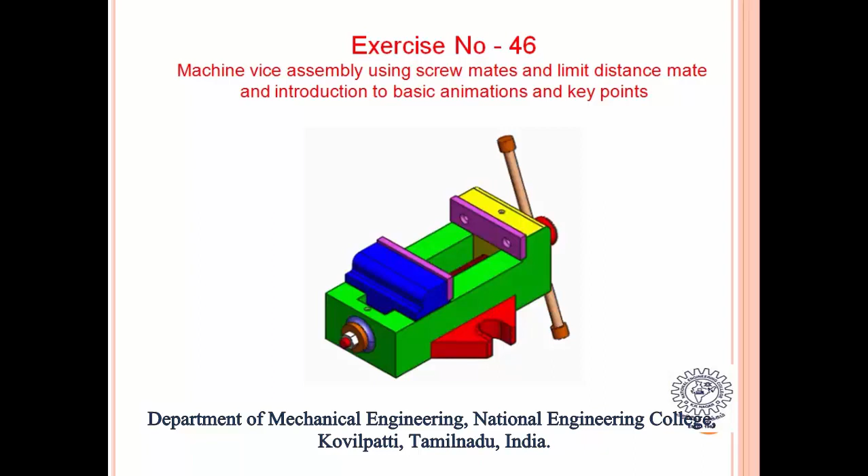Exercise number 46. Assembly of machine vise. First, select new assembly and click insert components and browse for the vise. Select the vise and give open. Make it as a fixed part.

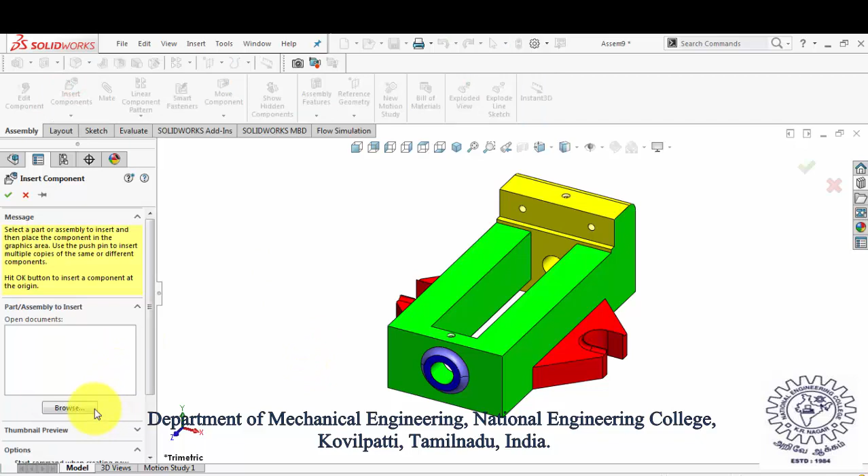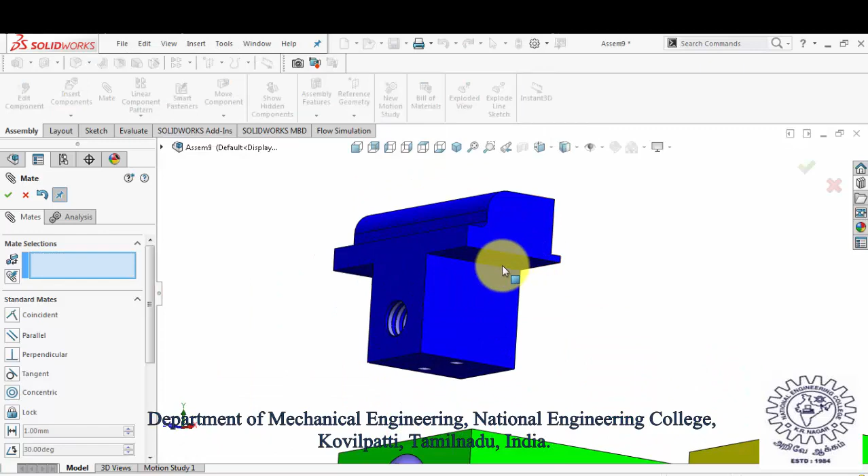Now select insert components and browse for moving jaw. Now open this component and select the side surface of the moving jaw on the surface of the vise and give coincident mate. Now select the bottom surface of the moving jaw on the top face of the vise and give coincident mate.

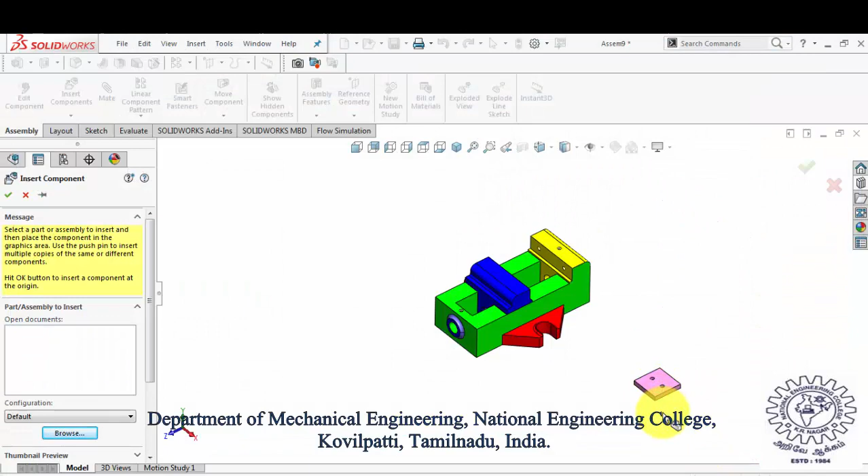Now select insert components and browse for clamping plate. Now select the face of the clamping plate on the bottom surface of the moving jaw and give coincident mate. Select the hole in the clamping plate on the inner projections of the moving jaw and give concentric mate.

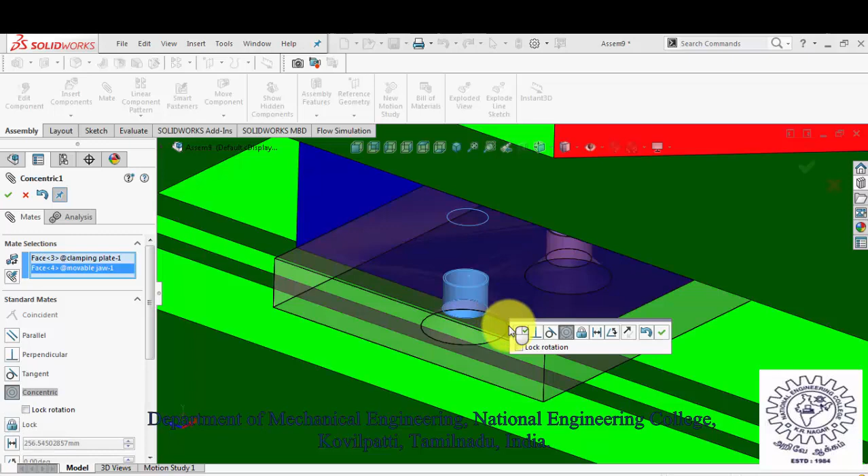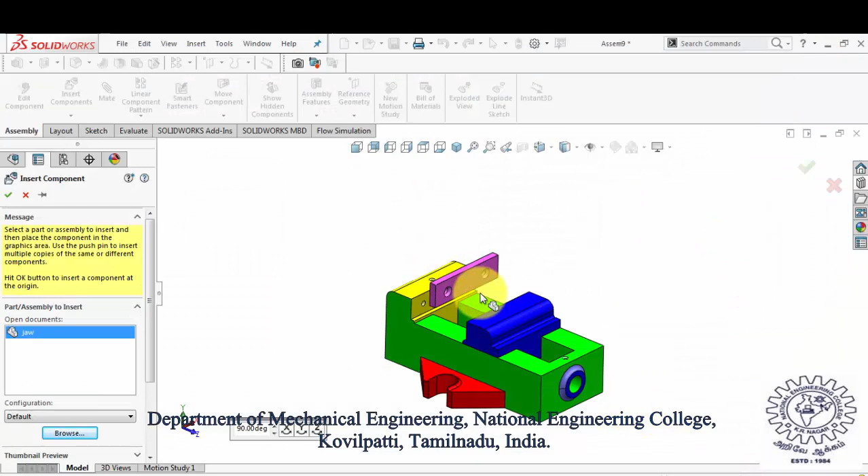Now select insert component and browse for jaw. Now select the face of the jaw on the front face of the vise and give coincident mate. Now select the holes in the jaw and the vise and give concentric mate.

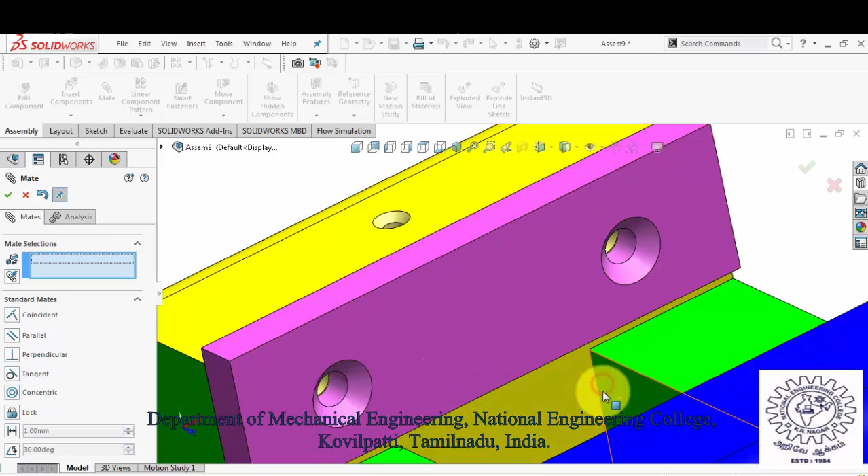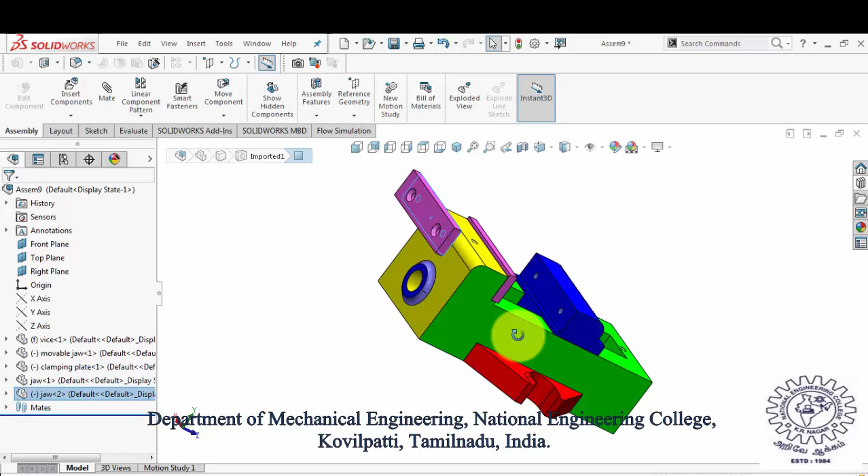As the jaw has to be used on the other side, press Ctrl and drag the component and rotate the jaw as required in the assembly using move with drag command. Now select the face of the jaw and the face of the moving jaw, then give coincident mate. Select the holes in the jaw and the moving jaw, then give concentric mate.

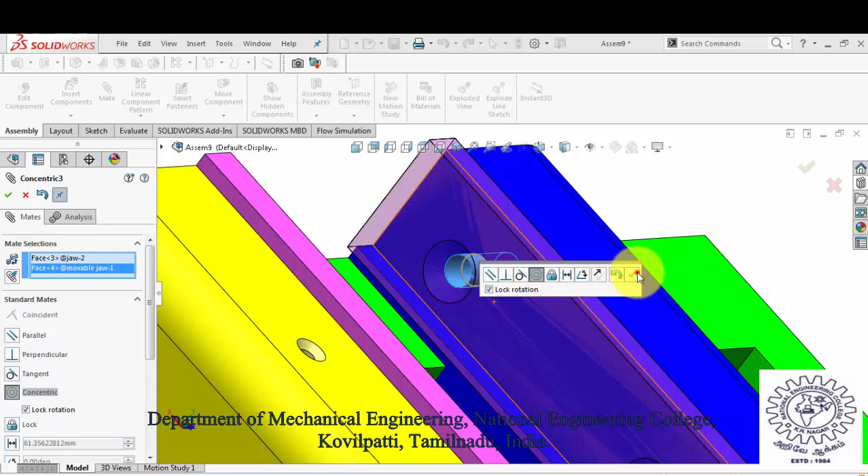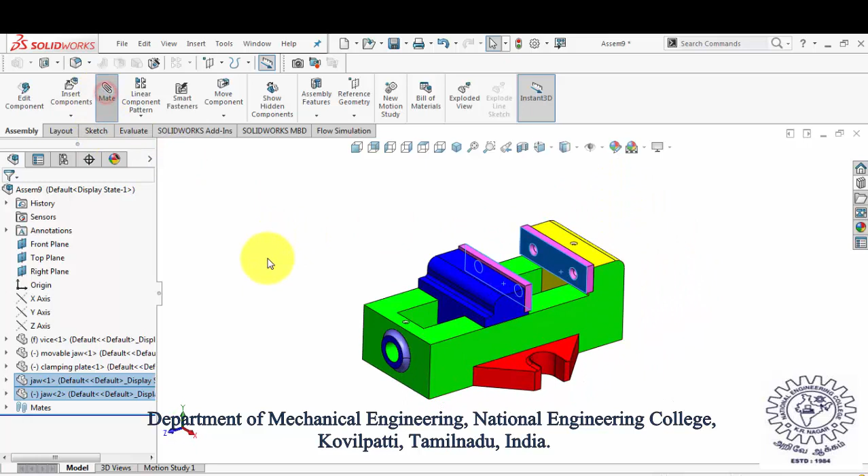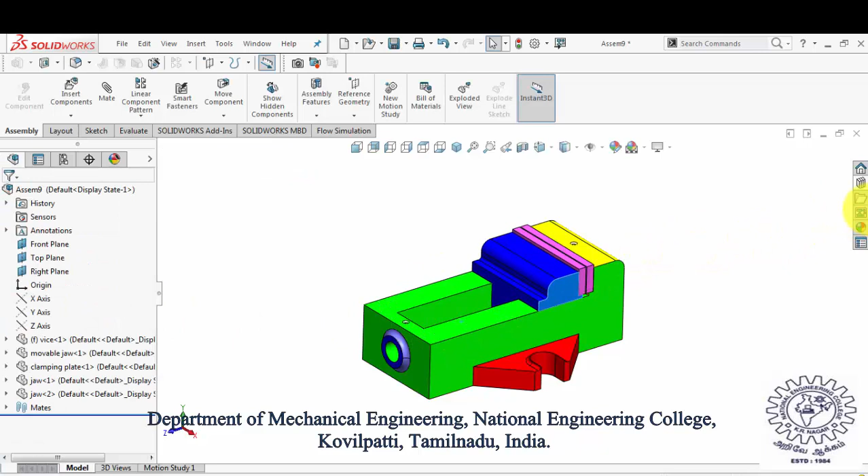Now, after the jaw is fixed in the moving jaw, select the face of both the jaws that are fixed in the assembly and give distance limit mate. Then specify the offset distance up to which the moving jaw is to be moved within the vise. Specify the maximum and minimum distance under advanced mates. Now, after giving dimensions, select OK. Now the jaw is limited to a particular distance.

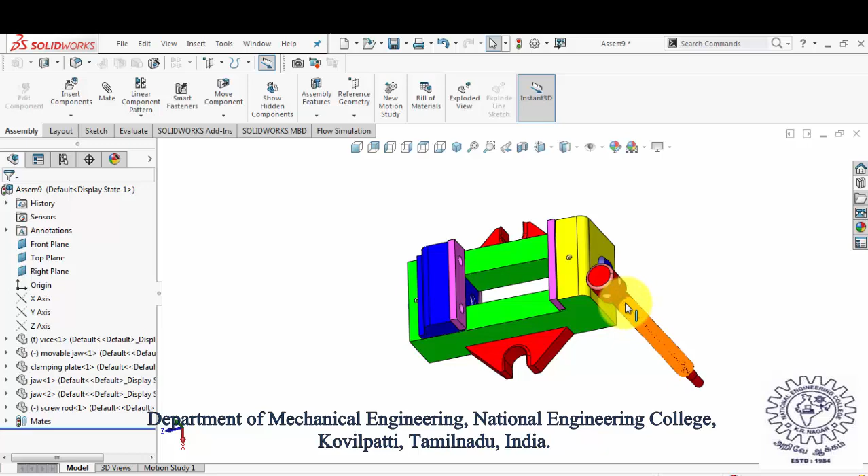Now select insert components and browse for screw rod. Select open. Now select the cylindrical face of the screw rod and the hole projections in the vise and give concentric mate.

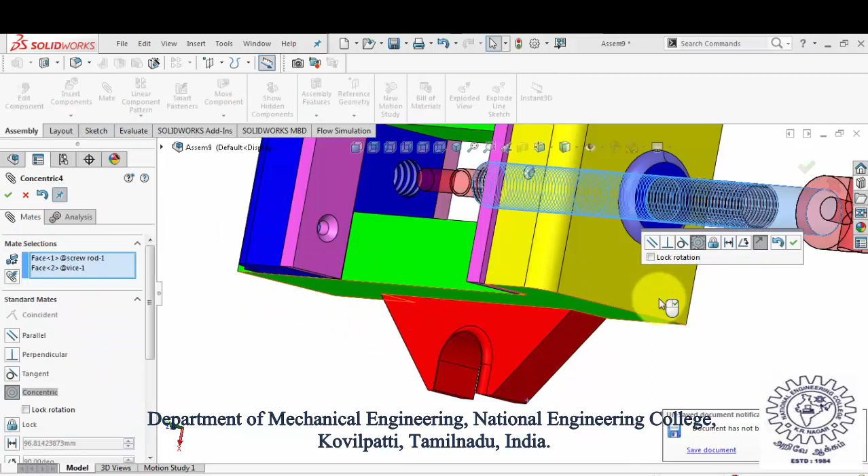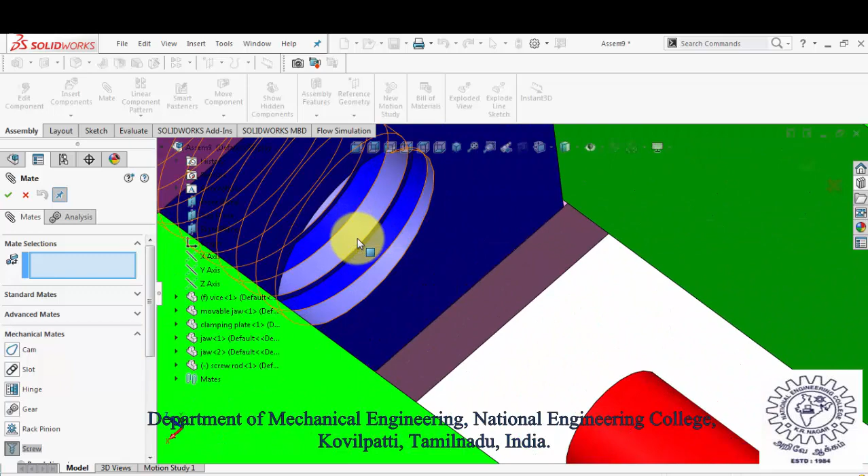Now under mate options, at mechanical mates, select screw. Specify the distance per revolution as 6 mm. Then select the face of the internal screw at the movable jaw and the external thread at the screw rod. After selecting both the faces, now click OK. Ensure whether the dimension of distance per revolution is specified.

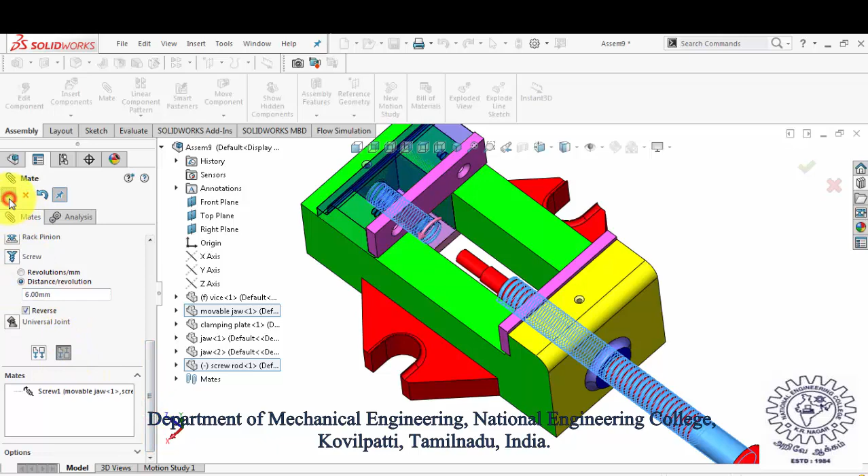Now, in screw rod, select the lateral face and select the top face of the vise. After selecting both the faces, give coincident mate.

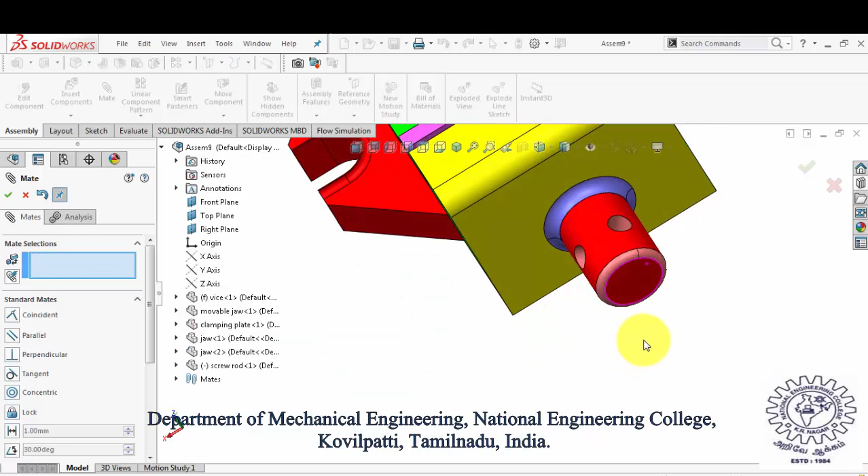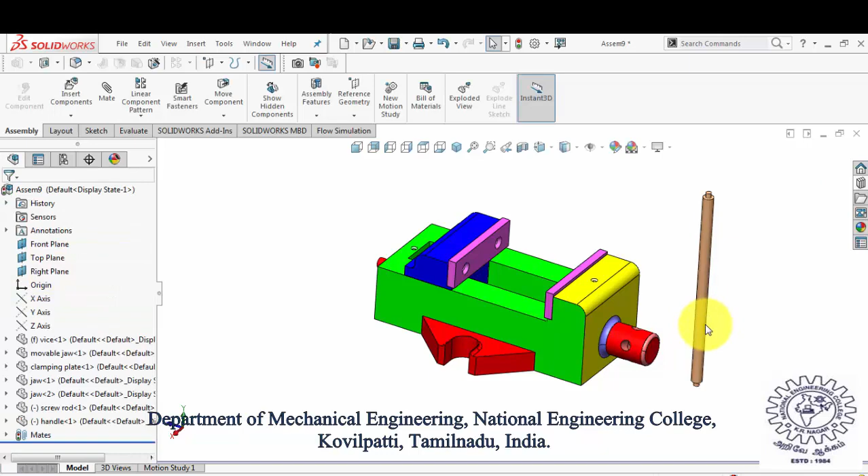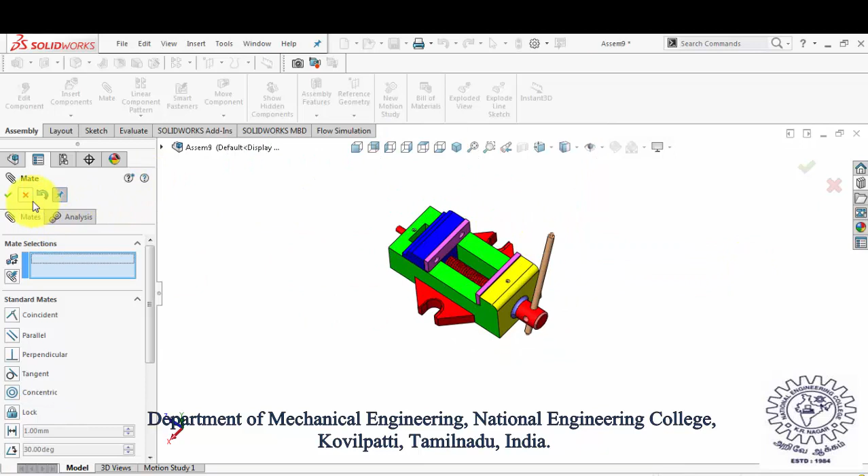Now select insert components and browse for handle. Select the surface of the handle and the hole projections in the screw rod and give concentric mate. Now select the top plane of the handle and the right plane of the screw rod and give coincident mate.

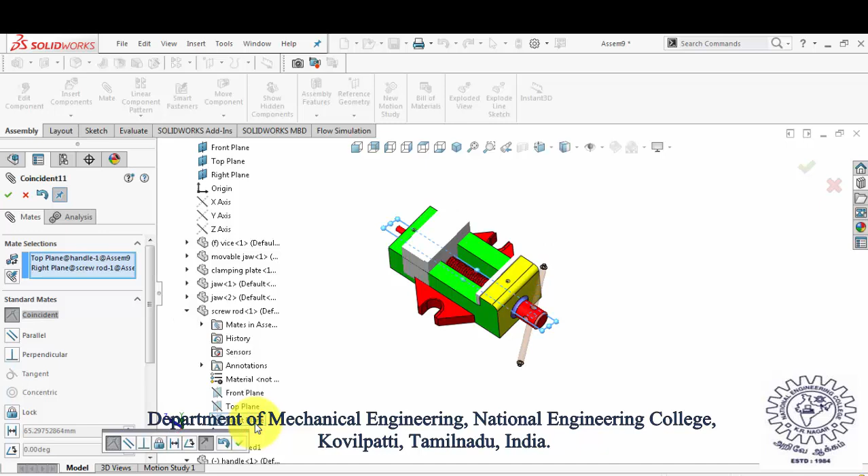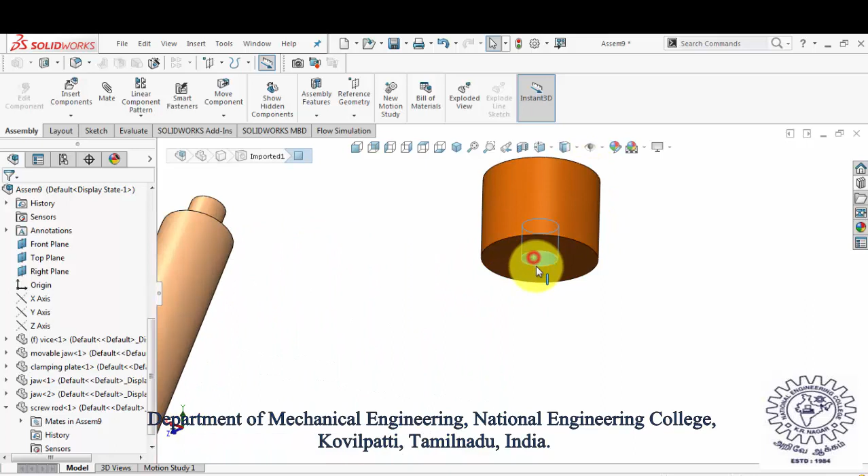Then select insert components and browse for handle cap. Select the hole in the handle cap on the outer portion of the handle and give concentric mate. Prevent the rotation by clicking lock rotation. Now select the bottom face of the handle cap on the top face of the handle and give coincident mate.

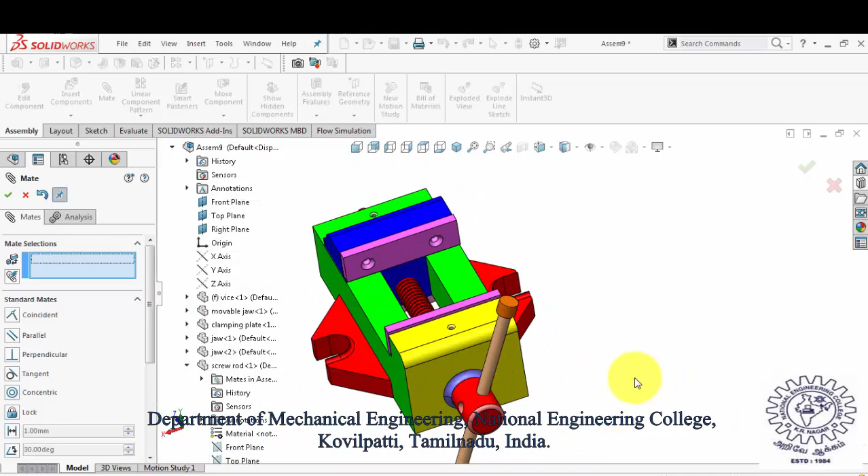Now under linear pattern, select mirror components and specify the top plane of the handle as a mirror plane and give the entities to be mirrored as the handle cap.

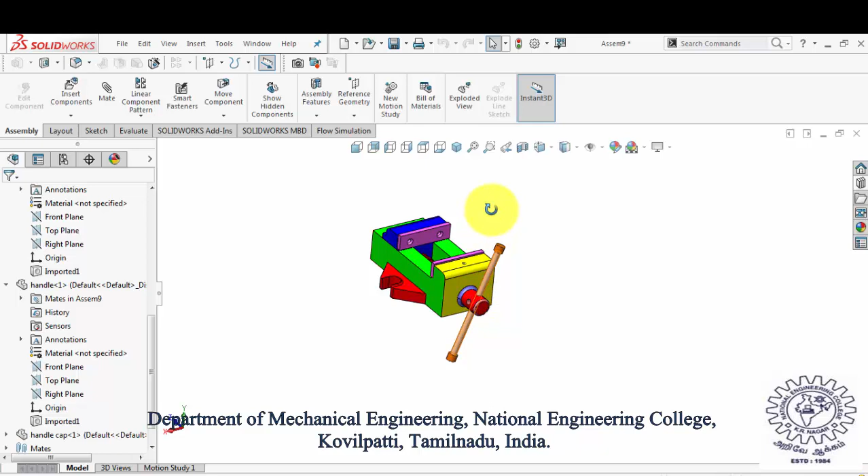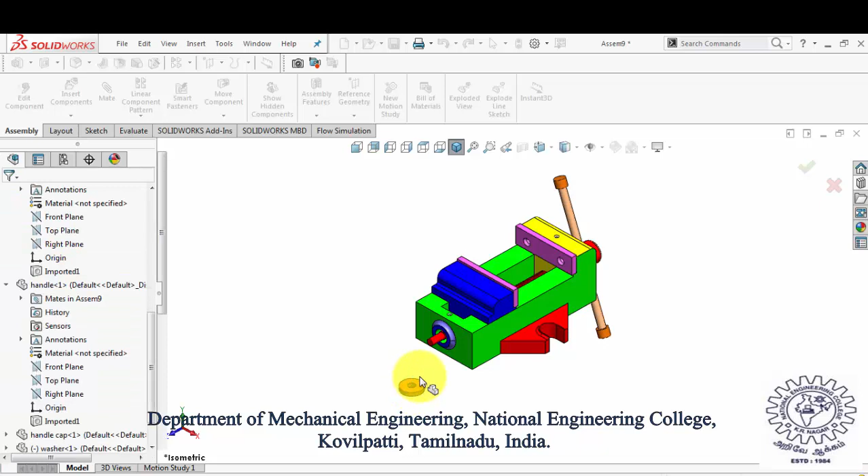Now select insert components and browse for washer. Now select the hole in the washer on the outer projection of the screw rod and give concentric mate. Now select the face of the washer and the face in the vise and give coincident mate.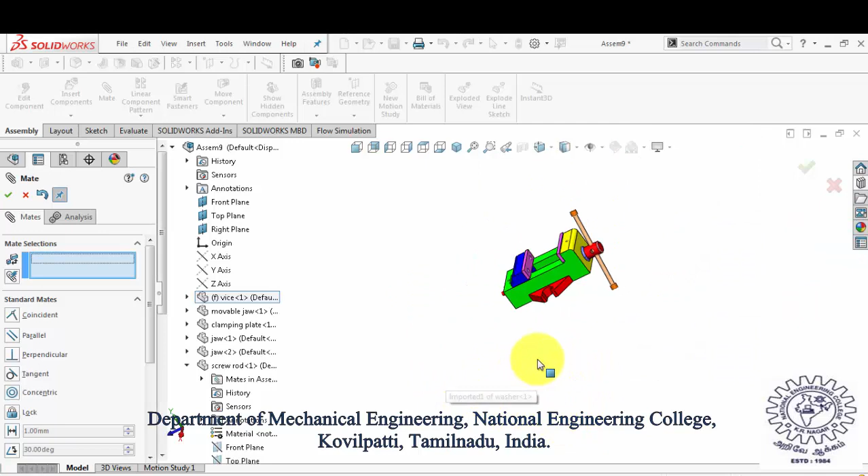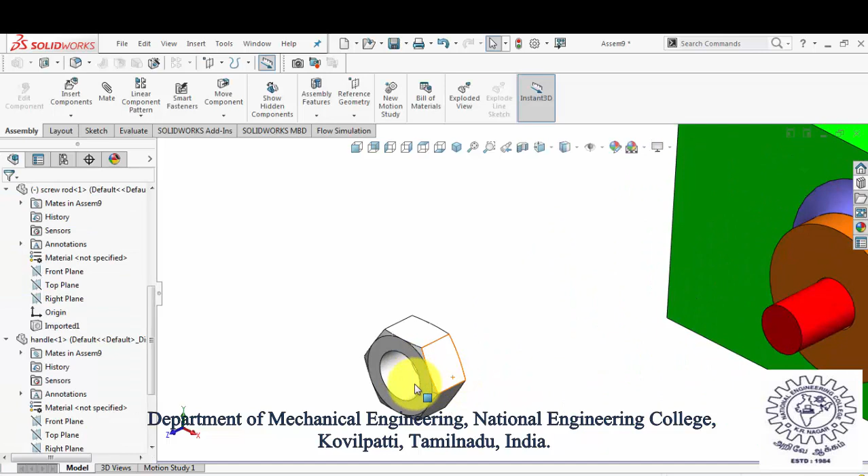Now select insert components and browse for lock nut. Select the hole in the lock nut and the outer projection of the screw rod and give the mate concentric. Prevent the rotation by turning on lock rotation. Now select the faces on the washer and the bolt and give coincident mate.

That's it. Our assembly of machine vise is done.